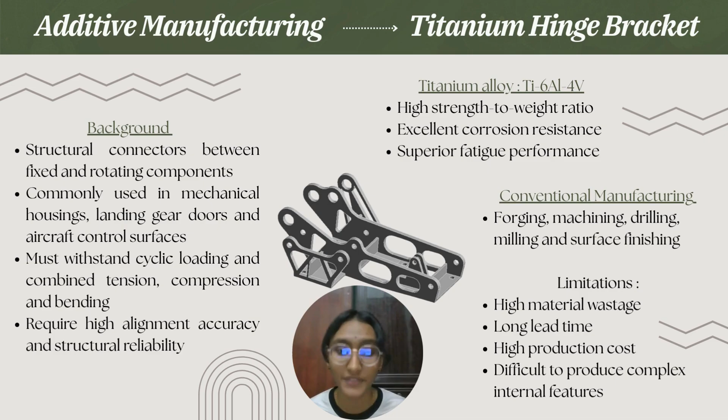Moving forward, titanium hinge brackets are produced by using advanced additive manufacturing, especially the laser powder bed fusion process. Laser powder bed fusion involves layer by layer fabrication using titanium powder, and selective laser melting is done based on customized CAD models.

This additive manufacturing process, especially laser powder bed fusion, provides a lightweight component and enables the production of complex geometries with internal features. It reduces material wastage, efficiently increasing material utilization, and it enhances stress distribution. Additive manufacturing also assists in integrating topology optimized structures.

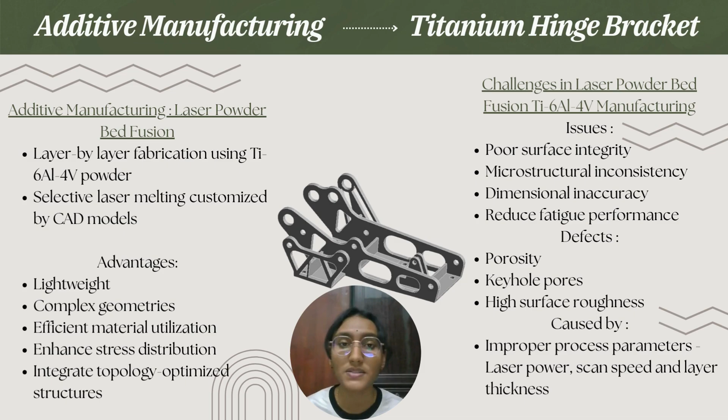However, laser powder bed fusion also presents some challenges in titanium hinge bracket production. There are issues such as poor surface integrity, dimensional inaccuracy, and microstructural inconsistency, and it also produces defects such as porosity, keyhole pores, and high surface roughness, which significantly reduce fatigue performance and affect the mechanical properties and strength of the component. It is mainly caused by improper process parameters such as laser power, scan speed, and layer thickness.

Next, I would like to explain the role of quality and lean management tools in the production of titanium hinge brackets. First of all, Kaizen promotes small, continuous and incremental improvements in the production of titanium hinge brackets. Kaizen also encourages the involvement of employees at all levels, and it helps to build a culture of problem solving and accountability. It supports long-term process stability in the production line.

Gemba Walks enable data-driven decision making, and help support cross-functional communication between the team and their management. The 8D problem solving method helps the team and the management identify the root cause systematically and helps us find permanent corrective actions.

Whereas Kanban is a visual tool to manage work in progress, and Kanban ensures that production matches actual demand. Thus, this can prevent overproduction and bottlenecks in the production line. As we connect it to the titanium hinge bracket processes, Kanban improves the flow between printing, heat treatment, and post processing.

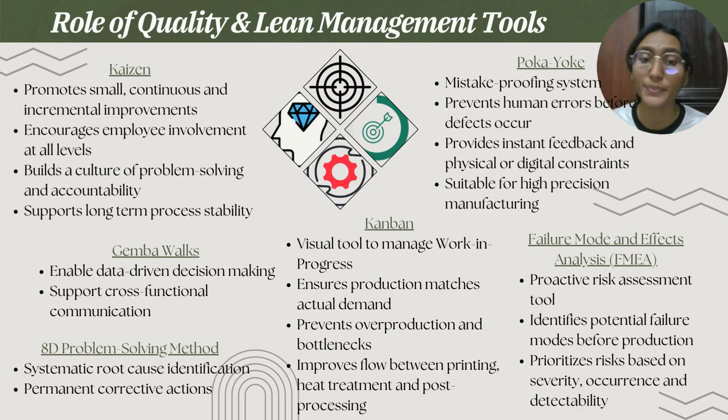Good day everyone. I will now continue to present the process overview of the titanium hinge bracket. For every product, we start from the design stage. This one is the same; we start with the 3D model design of the titanium hinge bracket.

After that, we continue with topology optimization. We use finite element analysis, which we normally call FEA, to remove the non-load bearing material, which helps reduce the weight of the final product. After that, we continue with support generation.

So some support structure will be designed to prevent the part from warping under the high temperature of the laser. Then after that is the preparation of the metal powder, which is one of the most important steps. So we need to ensure the particle size, the density, and also the flowability of the metal powder are suitable to ensure the smoothness of the melting process.

After all the preparation is done, before we start the printing, we need to do some setup on the machine. So we should ensure the inert atmosphere during the melting process. So we need to input argon gas to reduce the oxygen. This helps to prevent the titanium, which is very sensitive, from oxidation. Then after that we can start the LPBF printing. So the laser will melt the powder layer by layer.

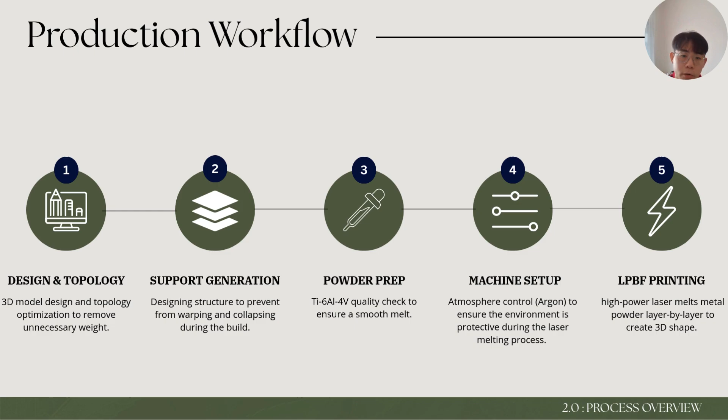Okay, once the printing process is done, we will do some post-processing steps to ensure the product meets the standard. It will begin with the controlled cooling process inside the inert chamber to avoid thermal shock and oxidation. Then is the heat treatment. So for this product, we use hot isostatic pressing. We call it HIP. During this process, high temperature and pressure will be applied to remove the microporosity and also improve the material density.

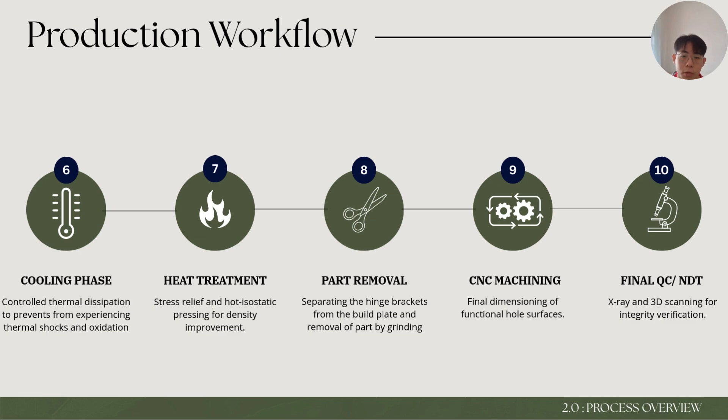Then after the part is strengthened, we will continue with the part removal by grinding and also using some cutting tools. Then the CNC machine will be used for the final dimension. We'll cut the extra material. Then finally, after all is done, we will do the quality checking and also the NDT, which is non-destructive testing, to ensure the geometry accuracy and also check whether there are any internal defects or surface cracking. Yeah.

Okay, so after we understand the standard process flow of the titanium hinge bracket by additive manufacturing, we also need to acknowledge the main quality challenges during this process. So the first main challenge is the internal porosity problem. This porosity is normally caused by gas entrapment or lack of fusion during the laser scan. This should be overcome by us because this porosity will reduce the load bearing area and lead to failure of the product.

So the next challenge is the residual stress, which is caused by the rapid heating or cooling process. If the heat treatment after the product is done isn't conducted properly, it will lead to warpage or even cracks that misalign the hinge. Then is the surface roughness. This happens because some partially melted particles during the melting process will stick on the surface of the product. This roughness will significantly reduce the fatigue life and also the wear resistance of our product.

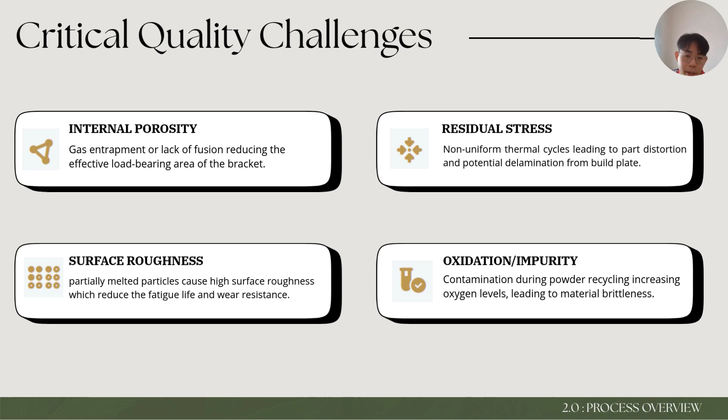Then next is the oxidation of the titanium. As we know, titanium is highly sensitive, so oxygen contamination will make the metal become brittle and also unsafe when the metal oxidizes. Yeah, that's all.

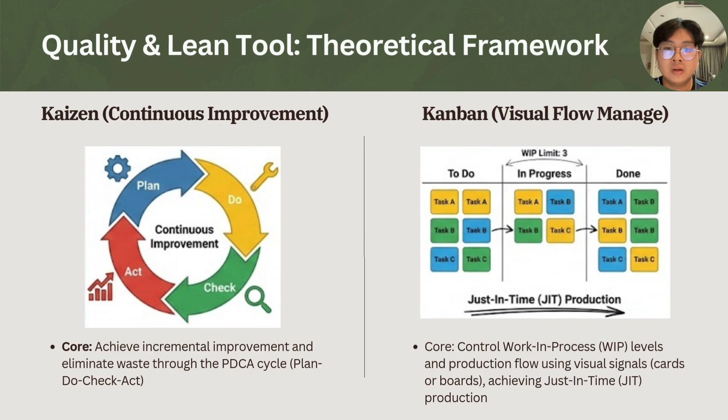In this session, we established the theoretical framework for process improvement. We begin with Kaizen, which uses the PDCA cycle for continuous improvement changes to eliminate waste. Complementing this is Kanban, a visual system that controls workflow and prevents overproduction by managing WIP levels. To ensure quality, we use Poka-yoke to mistake-proof the process, preventing human error through control or warning mechanisms.

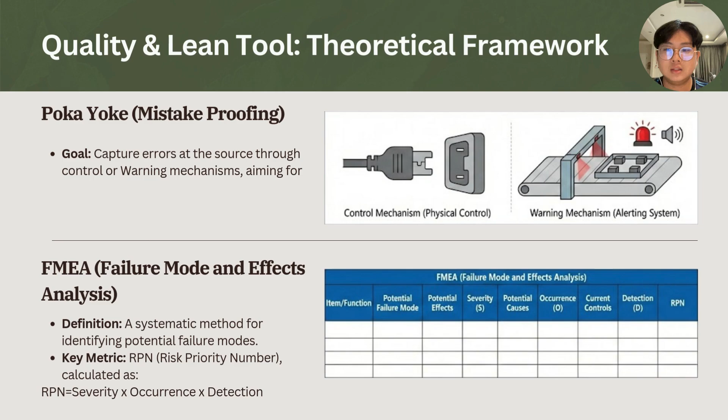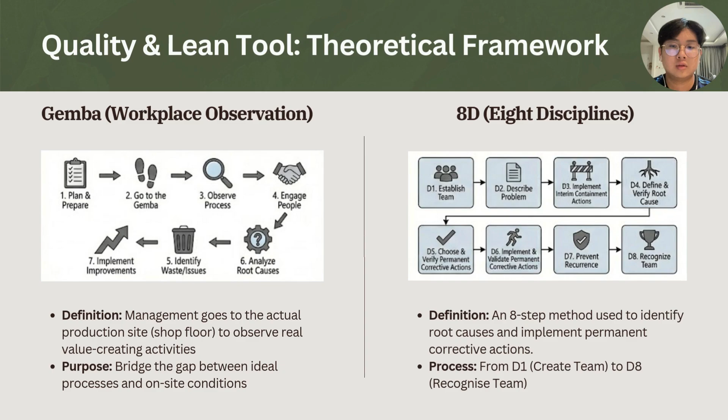We also implement FMEA, a more proactive risk assessment tool that identifies potential failures and prioritizes them using RPN scores. Finally, Gemba brings the management to the factory floor to observe the real value-creating activities. Actually, our solutions are grounded in reality. If complex defects occur, we apply the 8D methodology to identify the root causes and implement a permanent fix. These tools set the stage for the specific application discussed in the next section.

Okay, so the first tool that we will apply in our process is FMEA, failure mode and effect analysis. What we do is look at every single process, and then we determine the possible failure modes that can occur in each step.

So, and then we rank them based on severity and occurrence, and then the detection, so how hard it is to detect. And then we list out the effects and the likely cause, and then we create a control tool to reduce those failure modes. So in this case, we have a study from Muller et al. from 2024 studying LPBF using a similar process, and this is adapted. So you can see here how they list down all the potential effects and then the proposed quality tools.

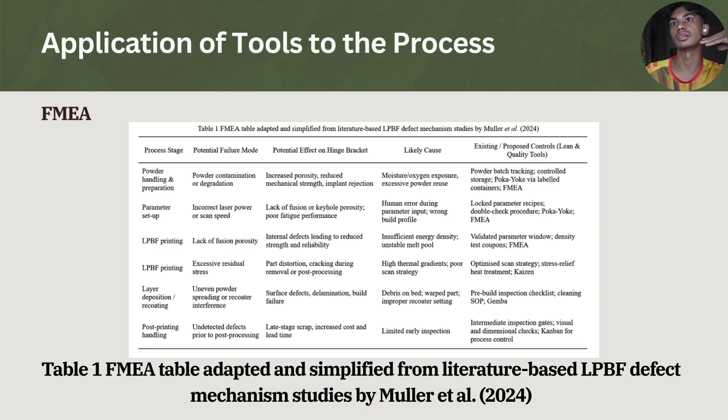Okay, so next is Kanban. So basically, the way we apply it in our process is that we define each process first. So for example, here we have printed, heat treatment, machining, surface finishing and inspection, and then we make slots. So for example, this machine can only have a maximum of 6 slots, or 4 slots, 2 slots, 3 slots, or 3 slots. And the main principle is a process cannot go forward if there is no empty slot in front of it. So here in my example, in the heat treatment, there are no empty slots.

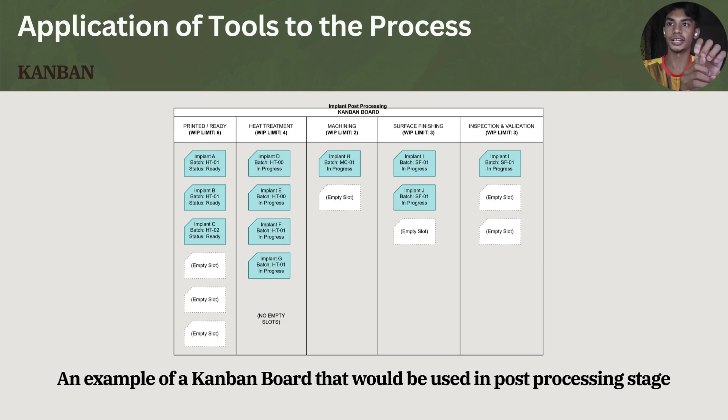So all the processes behind, which is printed, cannot proceed. It must stop first to basically stop overload of the work, so that it doesn't create a bottleneck in the system, so that the workload becomes much smoother and much more organized. So this is an example of a Kanban board. So basically each product, each batch will get its own card, and it will move through the Kanban board, and it can only move if there's an empty space in front of it.

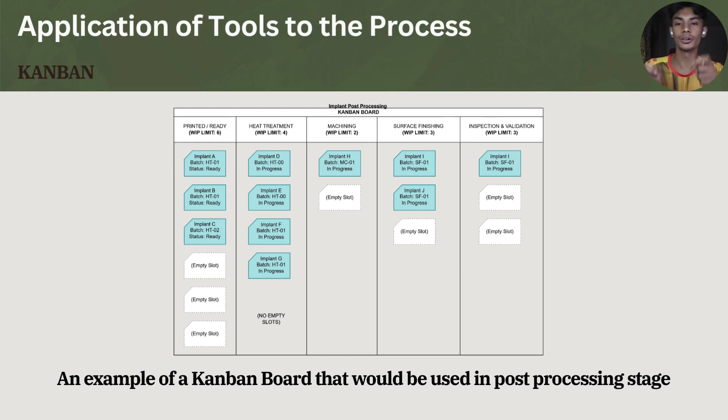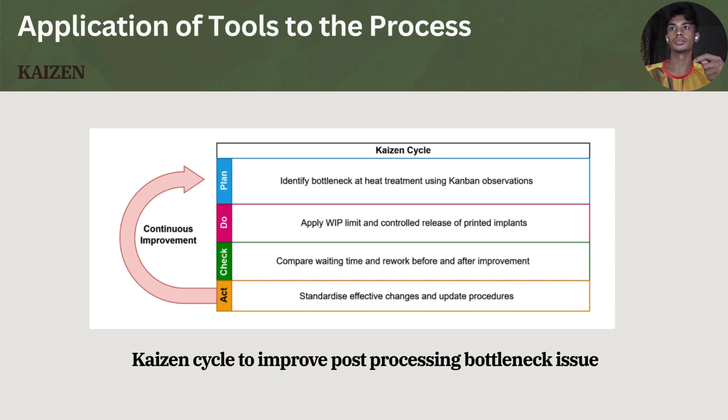Okay, so what is the Kaizen cycle? So the Kaizen cycle is based on the PDCA principle. So I'll give you the example from just now, where we use the Kanban board. So first we identify the bottleneck using the Kanban observations. Then for the do, we apply a WIP limit and control release of the printed implants using the Kanban board. And then we compare waiting time and rework before and after improvement. So does this improvement have any significant effects? And then if there are significant effects, we apply and standardize the effective changes across the whole line. So this is done at other processes also, but just now we have shown it through Kanban. And Kanban is one of them.

So my name is Shakir Ashraf bin Shari Azam. So for proposed improvements, based on the challenges identified in the LPBF process, several improvements are proposed to enhance process control, product quality, and operational safety. These improvements focus on automation, real-time monitoring, and digital technologies.

So the first improvement is AI-driven in situ monitoring. This system combines multiple sensors with machine learning to monitor the LPBF process in real time. It can detect defects such as porosity and lack of fusion during the build, allowing immediate corrective action. This reduces material waste and improves build consistency. So overall, it is an advanced error prevention system.

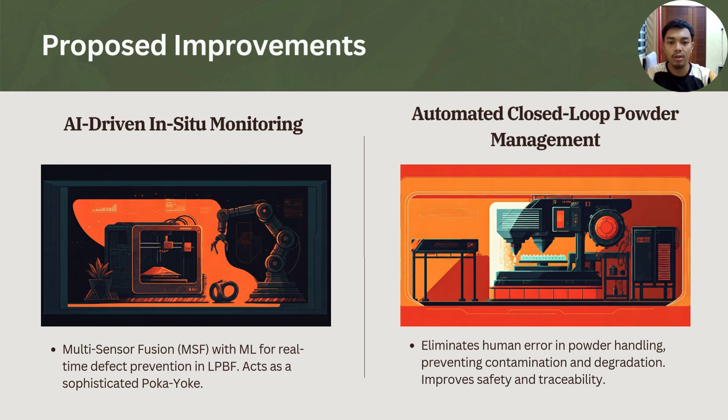So the second improvement, automated closed loop powder management. Manual powder handling often leads to contamination and inconsistent material quality. By automating powder handling and reuse, the system reduces human error, improves traceability, and enhances operator safety. This ensures consistent powder quality, which directly improves part performance and repeatability.

Lastly, the final improvement is digital twin integration. A digital twin creates a virtual model of the LPBF process using real-time data. It allows engineers to simulate process parameters, predict defects, and automate builds before manufacturing. So this reduces trial and error, shortens validation times, and improves overall production efficiency.

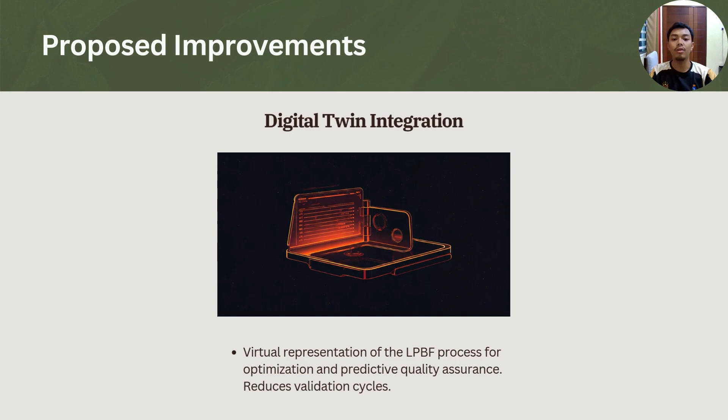In conclusion, quality and lean management tools form a robust framework for optimizing titanium hinge bracket production. Quality and lean management tools help to shift the manufacturing process from reactive inspection to proactive defect prevention, where they integrate with advanced digital systems that enhance the effectiveness of lean.

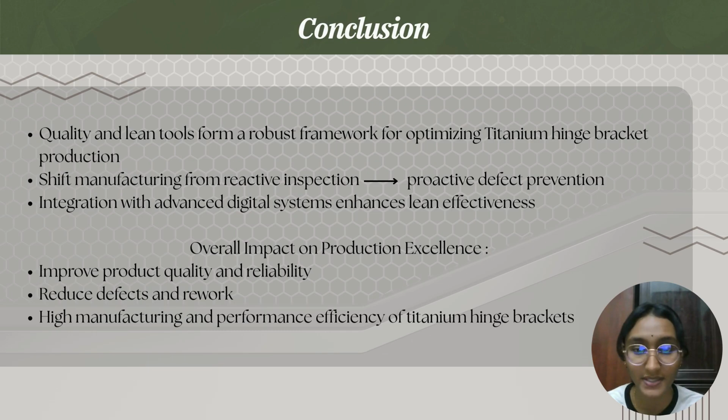Moreover, quality and lean management tools also impact production excellence as they improve product quality and reliability, and enhance the performance efficiency and manufacturing of titanium hinge brackets as they reduce defects and rework processes in the production line.